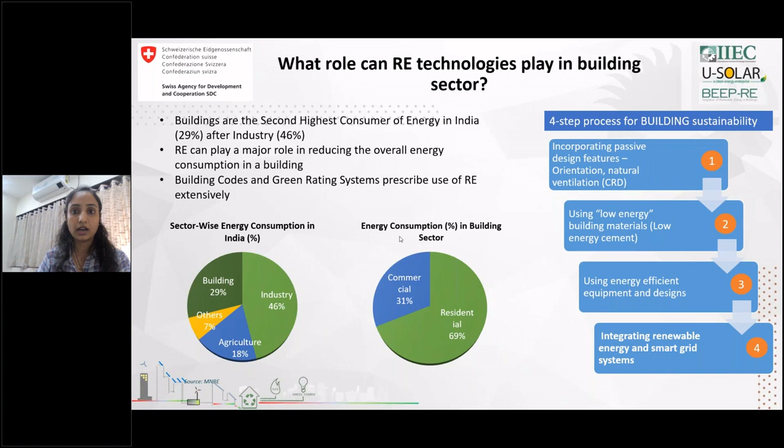Once we understand this process of designing a sustainable and green building, let's talk about which technologies are suitable from a renewable energy point of view.

We already know solar rooftop is a very prominent and promising technology. It has been used and is well known by designers, architects, and building owners alike. We've seen rooftop installations across the country, and it's a very useful option for designing sustainable buildings. The second technology is building integrated PV solutions, which we'll discuss in coming slides.

Hybrid solar PV and hybrid solar technology is very interesting, combining electricity generation and hot water generation features together in one single installation.

Small wind turbines are a potentially useful solution, with several innovations and designs now available in the market. When we create a hybrid project combining solar and wind, we get a very optimum energy production solution.

Next is biomethanation or biomass energy generation technology, where organic waste from kitchens or building premises can be utilized for generating biogas. This isn't a new technology, but it has been innovated, and several tech-based solutions are now available for biomethanation.

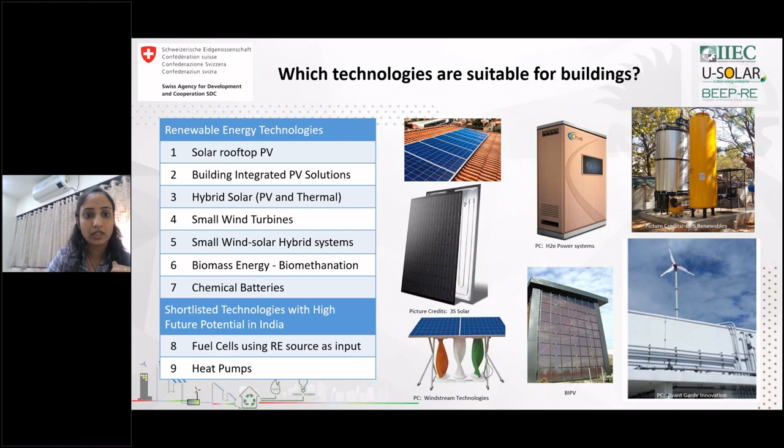Let's look at an overview of each of these technologies - what they are about, their working principles, how they operate, major business models, financials, and how to assess and size each technology. We'll dedicate each webinar to one of these technologies in the coming webinar series, but for now let's have a concise overview so we understand what we'll look at.

I don't need to explain solar photovoltaic - it's very well known. Photovoltaics aren't a very new technology, but there's still a lot of innovation going on for flexible solar panels, installations that can be integrated at any surface or level, and improving efficiencies, because the only real concern with solar is that efficiencies are still low.

There are multiple business models and options available for consumers to choose from, and we have numerous technology providers and system integrators in the market across the country providing these kinds of solutions.

This is a very default solution for designing an RE-integrated building and for getting green credit ratings. It's popular and well known, and with falling cost of the technology, it has become extremely cost viable - even for buildings, the cost of installation and generation of electricity from solar is much less than generation from the grid. This technology is a no-brainer for any developer and building owner, for reduction and utilization of whatever benefits and incentives are available for RE technologies. This is a go-to technology for everybody.

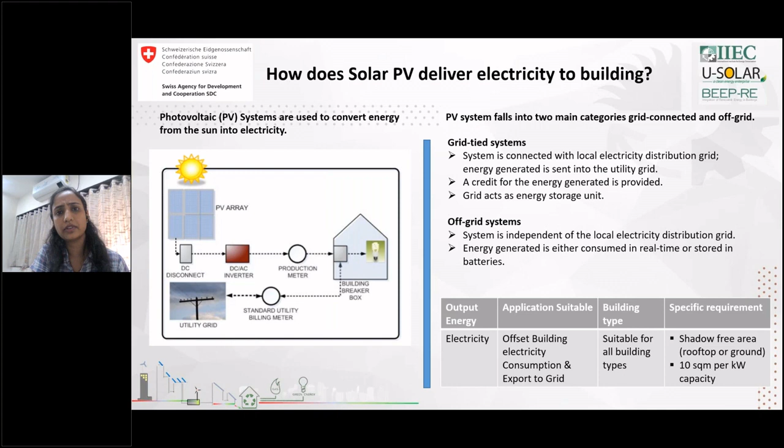So an offshoot of solar PV, I would say, is building integrated PV solution, wherein you integrate the solar panels on the facade of the building, so that you are able to generate electricity not only from the roof but also from the sides and walls, front walls of the building.

Now then, integration of BIPV, there are multiple design considerations that we need to take into account, and this goes without saying that orientation and facing of the building becomes a very important aspect when we do building integrated PV solutions. The components are similar to the solar rooftop system, just the panels are integrated on the front wall or wherever we get the maximum sunlight on the part of the building.

BIPV is still, I would say, not a very commonly used technology, although it is very promising. The concern is, as the orientation and all those considerations need to be taken into account, the efficiency of the generation from BIPV is extremely low if we compare it to the rooftop solutions, and therefore the costs associated are also high.

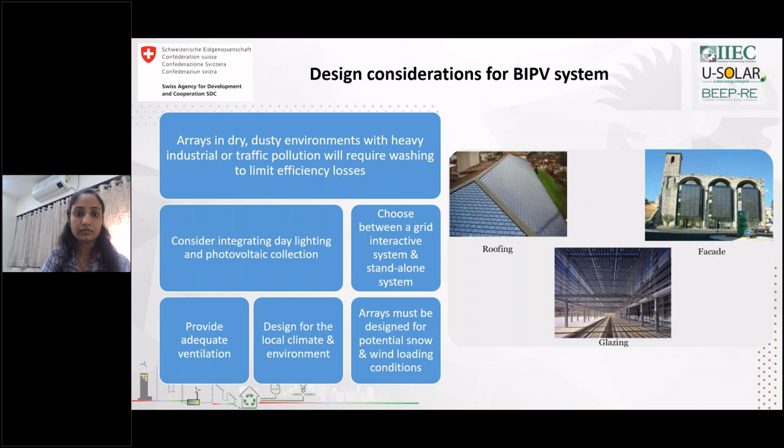So next is hybrid solar photovoltaic. This is a very interesting technology wherein photovoltaic panels, which convert solar radiation into electrical energy, are combined with thermal collectors. So whatever energy is hitting the top surface of the panel gets converted into electricity through the photovoltaics, and the remaining amount of energy is captured by the thermal collector at the back of the panel, and the waste heat is absorbed by those collectors. This helps in improving the overall efficiency of the system.

This system is very suitable for places where hot water demand and electricity demand are required in combination, say for example in hotels, hospitals, or maybe residential systems. So this technology makes a lot of sense there. Although there are not a lot of providers for hybrid photovoltaics, the number is growing, and there are a few which are available in the country.

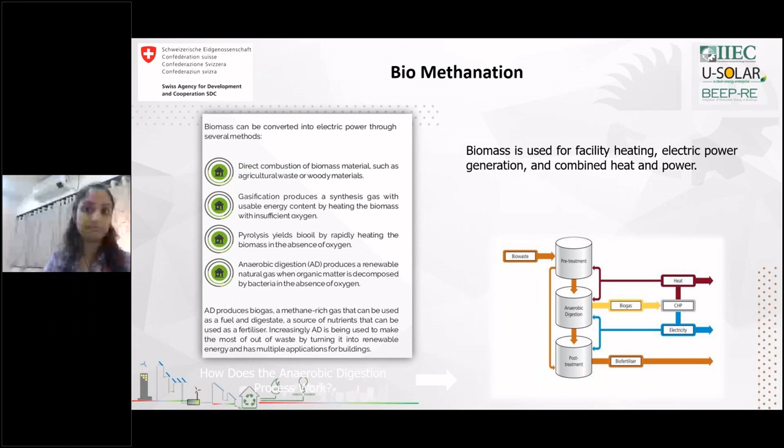We have looked at the basic features of each of the technologies. So if we look at it for a building premises, there are majorly three types of resources which are available: wind, solar, and biomass. And these are the three resources which are utilized in various forms for providing the end use energy requirement for any specific building.

Understanding each technology, it is very important to identify which technology would be suitable for my particular building or my particular place. So we have devised this very simplistic process, and we have used this for our pilot projects also, which involves basically a 4-step process.

First is the basic data collection from the site, identifying what is the consumption, what is the type of load which are going to be there, what type of electricity consumer or energy consumer the building would be, and what are the applicable tariffs, both electricity and thermal energy.

Then identification of the resources, the RE resources which are available at the site. Say for example, is solar available, is wind available, whether there would be enough waste for conversion to biogas. So all of these three options need to be studied and identified.

Say for example, if you're designing a building in the northern part of India, most of the landlocked parts generally do not have much wind associated. Therefore, each of these resources which have been identified need to be assessed.

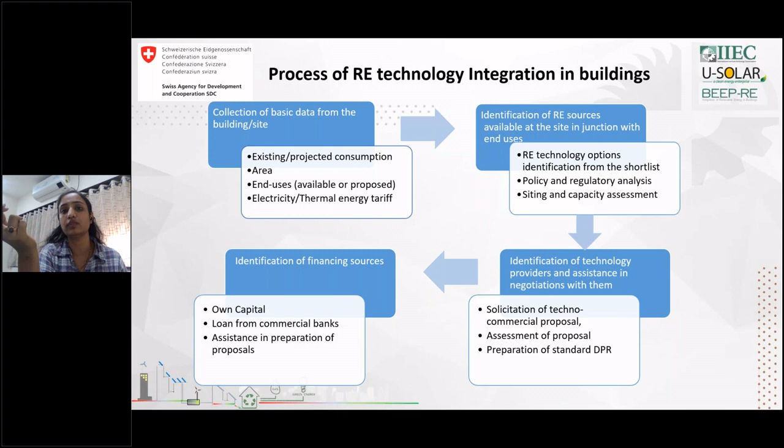Retrofitting is a very limited option. Probably a few solar rooftop solutions could be feasible, or maybe biomethanation, but the rest require a lot of planning at the beginning itself for integration.

So this again describes the second step in detail, on how the site resource assessment is done. For solar, we do sun path analysis, shadow analysis, weather data understanding, looking at wind flow and windrose diagrams, identification of the solid waste amount which would be generated, and then taking all these variables and parameters into account to calculate the overall potential for each technology identified or shortlisted.

Then the second step comes of the actual technology evaluation - what brand, what design, what kind of rating of that system needs to be provided or sited, so that you get the best performance as well as the best cost estimates.

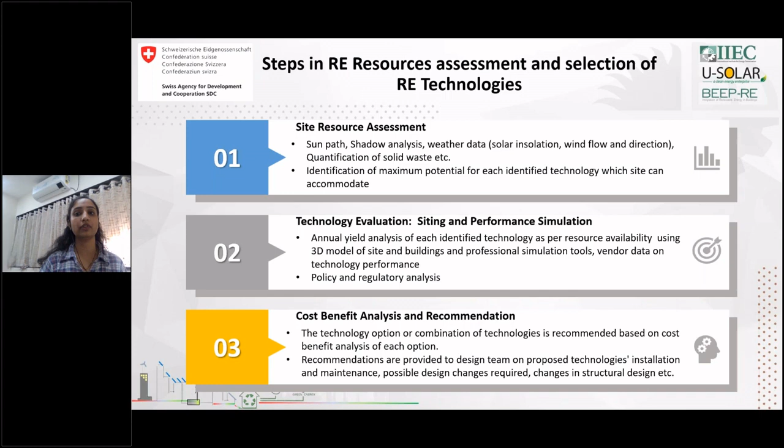Then the final step in the RE technology assessment is the cost benefit analysis, financial analysis, wherein we identify whether the technology would be commercially viable for that particular site or case.

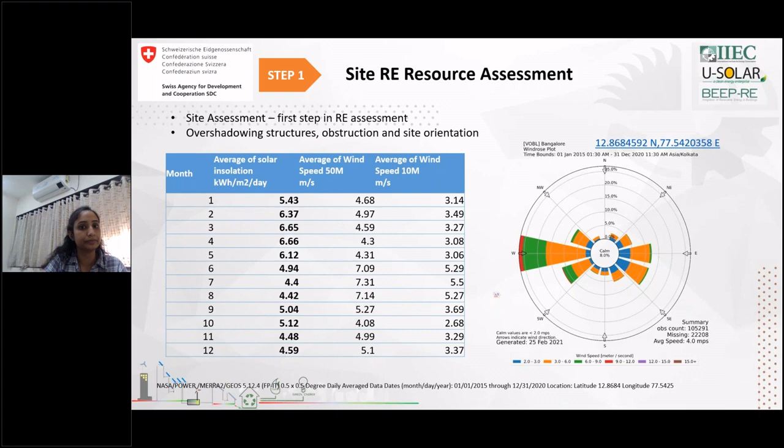So this is how we did solar resource assessment and wind resource assessment for a particular site. And we found that both solar and wind are potentially applicable solutions, and both were suggested and integrated in the building design. That's it from my side.

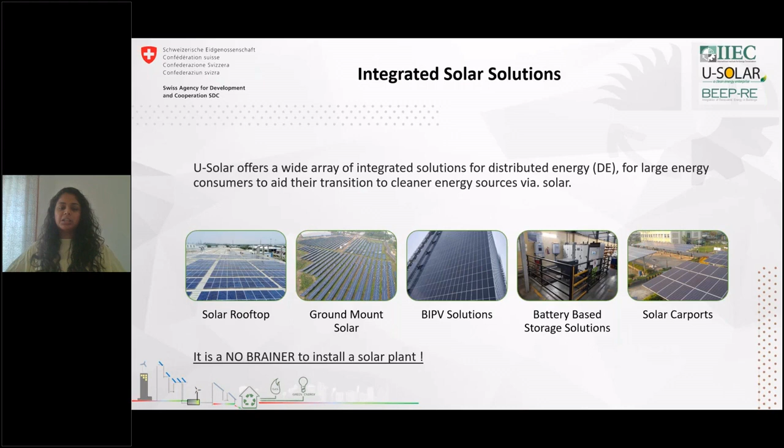So today, if a company is consuming a large quantum of energy, obviously their operations will be increasing year on year as a corporate grows. It's absolutely a no-brainer to install solar. Through this presentation, I will walk you through why, and at the end of it, I believe you will be convinced that solar needs to be a decision for every single facility, every building, at the integration and design stage.

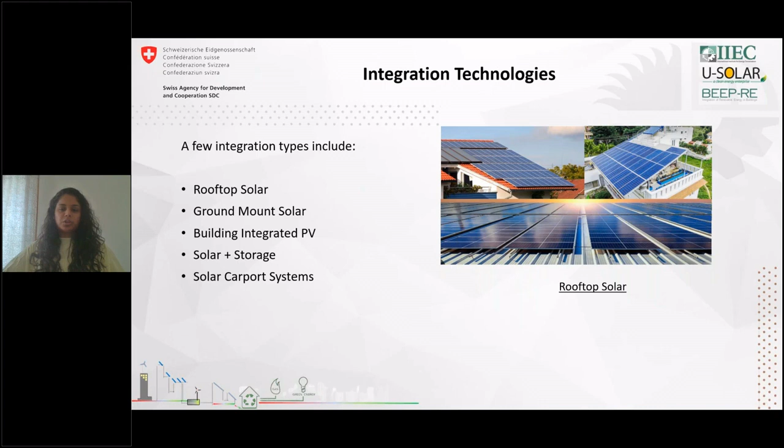Rooftop solar can be installed in commercial facilities, homes, apartment complexes for common loads, and even industries. You can see in our picture three different types of solutions, each a different composition of a rooftop system. One, top left, is PV modules installed on shingles on the roof. Another, top right, is PV modules installed on a high-rise structure on top of a residential house. Both of these being residential are quite different in their engineering aspect. At the bottom is a rooftop installation on a sheet roof for a large industry, or it could be a warehouse as well.

Moving to ground-mounted systems—this is very popular. Most solar projects are advertised as ground-mounted systems, so we won't get into it in detail.

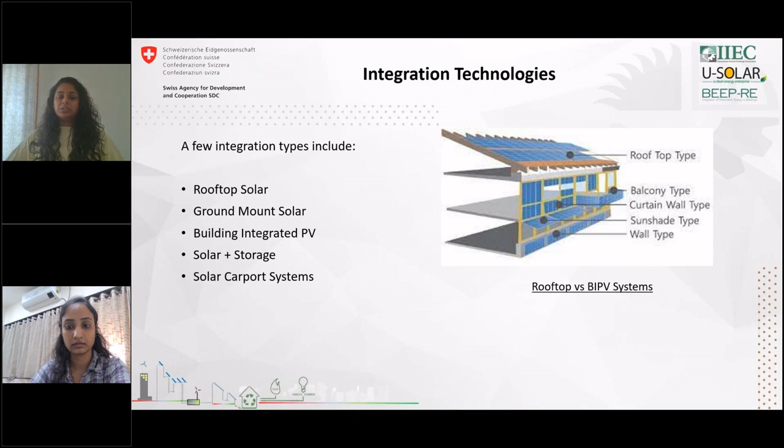Whereas a BIPV system is balcony type, curtain wall type, sunshade type, and wall type. All of these are integrated into the architecture of the system, and they replace an integral element. So not only will they have the function of energy generation, but they also have to serve the function of the material they replace. Sonia explained in the previous section that this could be ventilation, light, or insulation for the building, and so on.

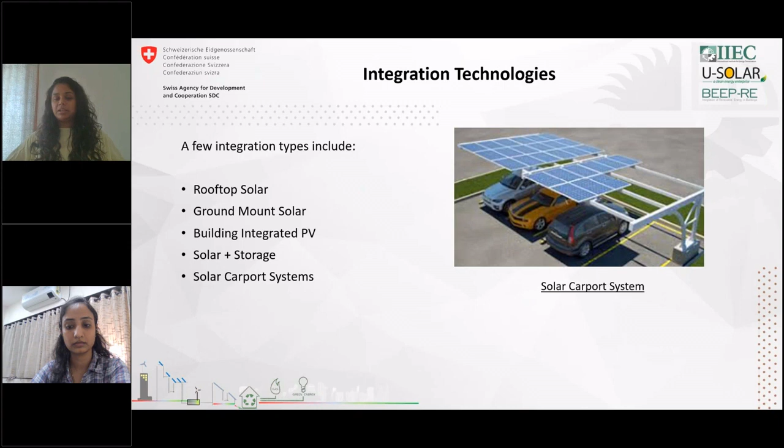I'm going to skip solar and storage systems because it's simply a solar system with a battery addition—this could be lithium ion or lead acid. Moving to carport systems, these are superstructures built to provide shade for the carport. Instead of creating shade roofs, we integrate solar PV, so it has a dual purpose: not only providing shade for the cars within the car park, but also serving as an energy generation source for the facility.

The financial models that are most popular for the adoption of solar are the CapEx and OpEx model. It is pretty self-explanatory. In a CapEx model, you create an upfront investment. Operations and maintenance needs to be paid. As I mentioned earlier, asset management services offers this to our clients. Ownership of the asset lies with the purchaser, and the return of investment is within 4 to 6 years.

Whereas within the OpEx model, it is a zero investment model. A developer such as U-Solar would come in and create the asset and then sell the power to the consumer at a LCOE that is lower than the electricity bill. There are stringent qualification criteria for the OpEx model since it is the developer's complete investment. Most of this criteria relies on the balance sheet of the consumer. And the ownership of the asset will remain with the developer for the duration of the power purchase agreement and automatically transfer at the end of the duration.

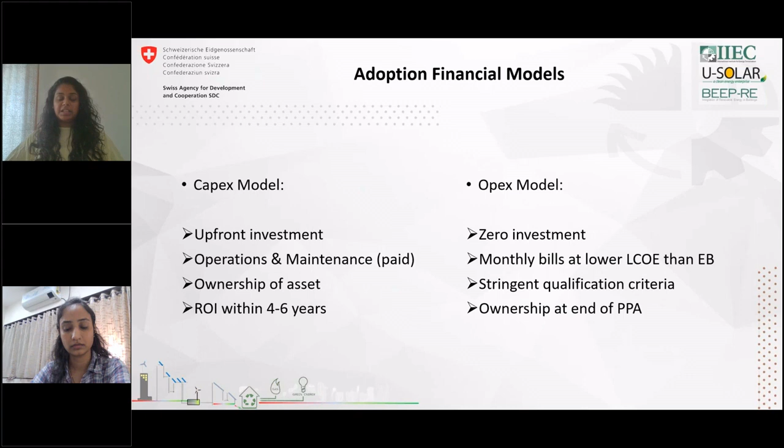So let's dive into the solar system deployment process and understand what are the steps required to purchase a solar power plant. So the first step is to do an initial assessment. This would include an estimation of the capacity, the estimation of the price, and the overall feasibility of the project. In order to do this, we ask our clients to send us their rooftop diagrams, either in AutoCAD format, or we ask them to send us a Google coordinate so that we can tap into our resources and do our assessment through satellite imaging. We also ask for electricity bills for 6 months.

The ideal would obviously be a 12-month period, which would give us an entire understanding of their energy consumption pattern through the year. Once we have understood their energy consumption pattern, we size the solar plant. We will have to do a site survey to understand if there are any obstructions that are not visible through our imaging softwares, do a roof assessment to check the load bearing capacity, and also figure in the termination details of the plant. Once all of this information is put together, we have completed, in essence, our technical evaluation.

And we have the ability to create a bill of material and put together a commercial offer. So a design brief with the estimation on the cost, the layout, the savings, the returns, the financial outlay is provided to the client. Once this is accepted by the client, generally after a couple of rounds of negotiation, a project is commissioned. So the commissioning of the project in itself is quite an elaborate process, which we will get into through the series of these events.

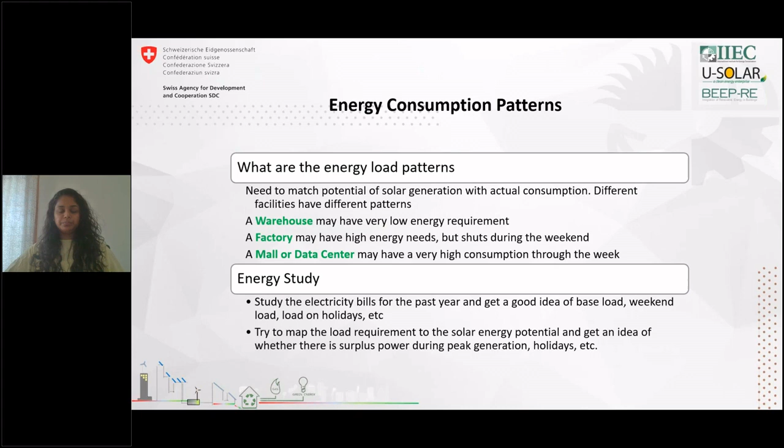Another very important consideration, especially when talking about the Indian market, is the solar state policy. Each state has its own policy, and these policies sometimes vary considerably across states. What we need to understand is the implication of net metering. Net metering is the export of excess solar energy during non-consumption days. I already touched upon holidays and maintenance days, for example.

Let's say a university wants to install a solar power plant - what are they going to do during the summer vacation or the Christmas vacation? Solar is still going to be generated, but they will not be consuming a lot of it. So their investment should not be idle. The mechanism of net metering allows them to export this energy and net it off in their next month's bill.

A couple of things that vary across the states are the net metering export tariff. It varies state to state, typically between 2 to 3 rupees. There are also considerations such as the contract demand, which is your metering load connection taken when you ask for grid connectivity. So the amount of solar possible depends on the connected load or contract demand. In Gujarat, for example, it's 50%, in Karnataka it's 85%, in Andhra Pradesh it's 100%. This changes from state to state, and the policies also continually change.

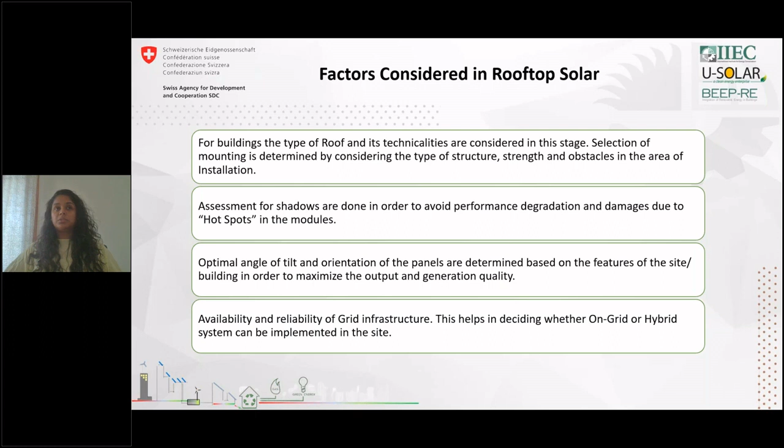The last point is we have to look into the availability of reliable grid infrastructure. The startup power for any rooftop solar plant is typically provided by the connection to the grid, even if it is not using a net meter system. There are also other considerations that can be taken if there is no strong grid connectivity - we will then install a hybrid system or an off-grid system. A hybrid system could be connected to a DG source or a battery, while an off-grid system is connected only to a DG source.

So I've gone through a couple of broad considerations on the type of roofing material. A couple of examples to look at: for a sheet roof, the galvalume sheet needs to be greater than 0.47 mm. Asbestos sheet is absolutely not recommended.

We usually ask our clients to change their sheets if it is asbestos to something more reliable. They need to have load bearing capacity. Most roofs already do because per square meter a solar plant uses 15 kg, so it's not that much. But we will still look into the load bearing capacity through a load flow study, a load analysis using software such as STAAD Pro.

We also look at safety, since a lot of these rooftops are a couple of stories high. We check if there are railings, fall protection, and safe access to the roof. A lot of material movement happens during installation and also during the maintenance process post installation, so we look into these. All of our solar assets follow very high safety norms.

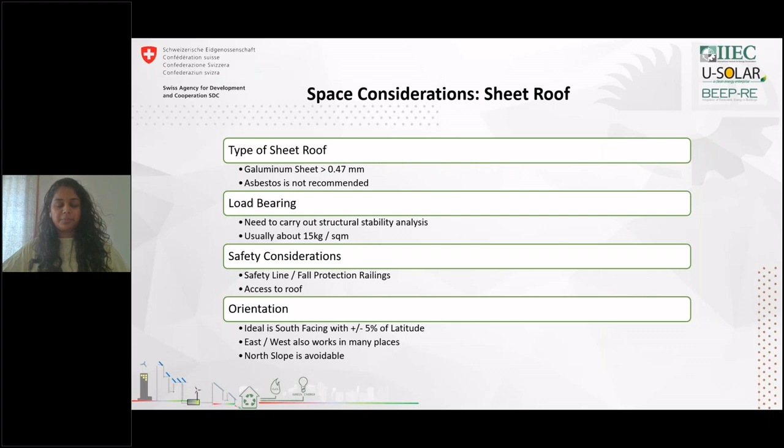The solar panels are integrated to each roof in a different mechanism. An example here is a sheet roof system. We use clamps placed on the panels between the sheet roof and the PV structure, and the structures are laid down on the clamps with the PV on top of the structure.

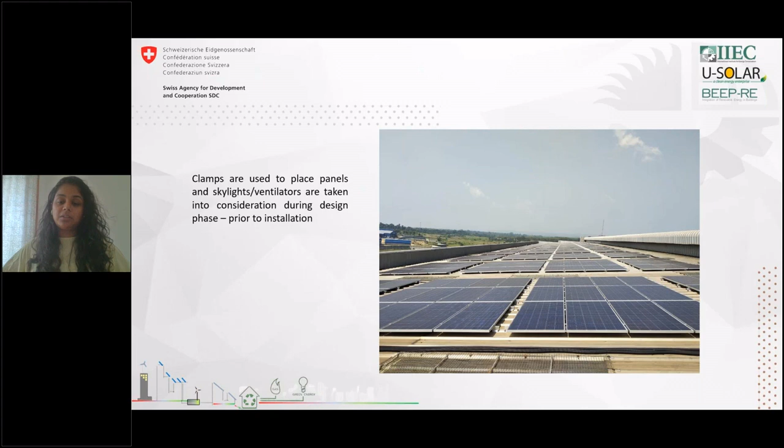We also have to take into consideration skylights and ventilators, not only during the installation process, but as I mentioned previously, we will have engineers visiting the solar plant and the roof frequently during the lifetime of the project.

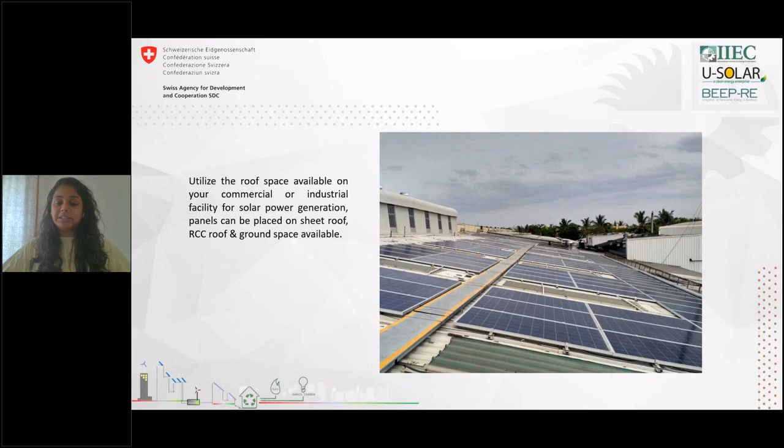Another way to utilize it is by picking roofs that have some kind of pre-existing tilt, so that automatically improves the yield of the asset.

So some considerations on an RCC roof. Obviously we have to look at the shadow-free area. RCC roofs usually come with a lift room on the roof, or there will be parapet walls that provide some shadows into the usable area. We have to take those into consideration.

We also have to understand what is the roof plan for the future. Many RCC buildings have these concrete blocks, or pedestals, that are placed for elevation of another floor. So that ties into what kind of structures we will use: will it be fixed structures or movable structures that can be taken to the next floor?

Shadow analysis of all obstructions is done. There are a couple of software options for this; we use Google SketchUp. Other considerations taken are the weather, and whether the structures can be grouted to the roof.

If they are, let's say, ceramic roofs, clients do not prefer chipping of the roof, so we will have to come up with an alternative solution. We use weighted ballasts in those cases.

Layout orientation: in an RCC roof we have more freedom to move the panels and orient them true south, but sometimes this might change the total capacity of the solar plant. So we have to do a cost-benefit analysis on which would improve the client's savings. Usually load is not an issue in an RCC roof because they're built to take much stronger loads than a typical sheet roof.

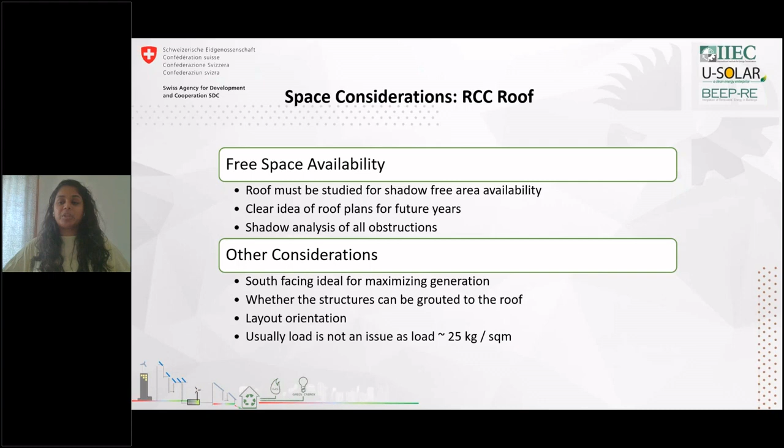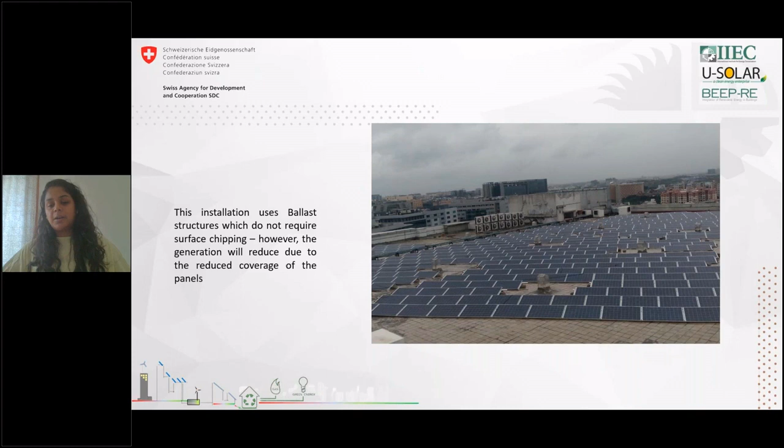As you can see here, this installation uses ballasts, so it doesn't require surface chipping. This particular client wanted the freedom to elevate his floor, so the panels are placed very close to the ground. While this gives him some benefit in terms of his future plans for the facility, it will definitely reduce the solar yield by a small amount compared to if we would design a permanent structure that optimizes the generation.

So once we have finalized the solar capacity based on space, with all considerations taken into account, we create a layout on AutoCAD software, and this is plugged into our proposal, which is given to the client after our economic analysis.

Before going into the economics of the plant, I'd like to talk a little bit about the factors that should be considered in a BIPV system. Sonia has already mentioned some of this, but let me go through it briefly.

The requirement for light in the building is a huge deciding factor on which type of BIPV module needs to be used. There are a couple in the market, so the more light and visual capability we have to provide in the glass, the lesser the efficiency of the module. BIPV modules are typically glass modules, with the front face and back face being glass, and PV cells integrated in the middle.

If we want a larger amount of light to pass through, the cells are spaced further apart, so the overall capacity of that module will reduce, and thereby its efficiency will reduce. However, if the PV cells are placed closer together, the efficiency will increase, but the amount of light that passes through will reduce. So we have BIPV modules starting all the way down to 150 watt peak, going all the way up to 600 watt peak. The transparency of the module moves from 150, which is the highest, to opaque, which is 600.

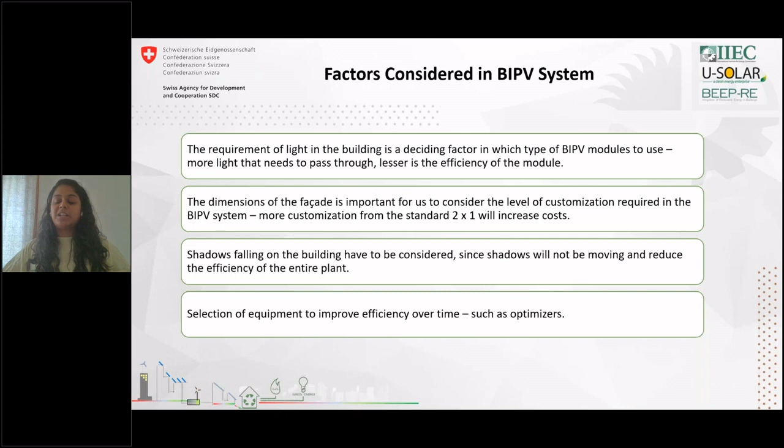There's really only one crucial question if somebody wants to explore a BIPV plant, and that is: is the building a greenfield project? It is not commercially viable to retrofit BIPV. In fact, it's not BIPV if you retrofit it—it needs to be integrated into the architecture of the building.

So if it is a greenfield project, we will start working with architectural firms, facade consultants, and an EPC company such as us that can curate a solution, curate a building that satisfies every single requirement. The architect creates an aesthetically pleasing, realistically constructed building. The facade consultants come in and provide their services on the material type, and we offer our solutions on the electrical capabilities, the integration, the requirements for what panels will be installed, how the wires will be run across, what the capacity of the solar plant will be, what their savings would be, and so on and so forth. This creates a BIPV system that is actually market deployable.

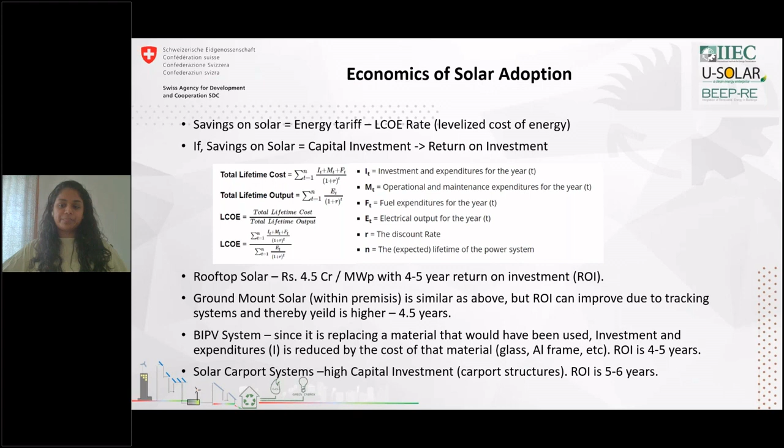To summarize, the selection of technology depends on space availability. If it's a BIPV system, then we use a multi-stakeholder approach, and we offer solar consultancy at an early stage for greenfield projects. Solar is a no-brainer - for a 25-year lifetime, you receive an ROI within 4, max 6 years.

So that's pretty much over 20 years of free energy. It is definitely a no-brainer - everybody should do it. Distributed energy should be your first step in your energy transition process. It also creates a more sustainable outlook in design. So yeah, I hope I've convinced you as promised.

So, RE integration - while we have spoken in detail about solar, other energy sources will follow a similar process. First, you have to study the energy patterns, then you select the technology based on the sizing of the system, and you have to evaluate the policy compliances. These three things go hand in hand.

I would still say solar is the best distributed renewable energy, because specifically being located in the Indian subcontinent, if your facility has space, you should install solar there and then explore other RE sources to complement it. A hybrid renewable energy system is obviously best - that will maximize your clean energy utilization.

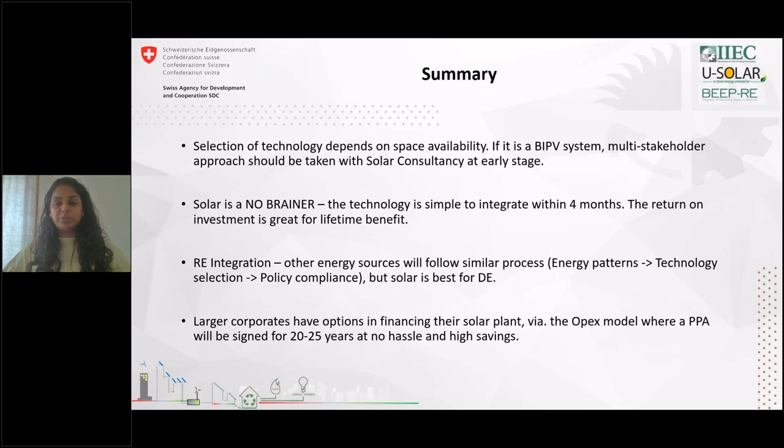Larger corporates today have options to finance their solar plants via the OPEX model, where PPAs are signed between 20 to 25 years. This essentially means that at no cost you can adopt a solar plant, so you have absolutely no hassle. The plant is maintained by the developer and you get great savings. Thank you, I'm open to questions if there are any.